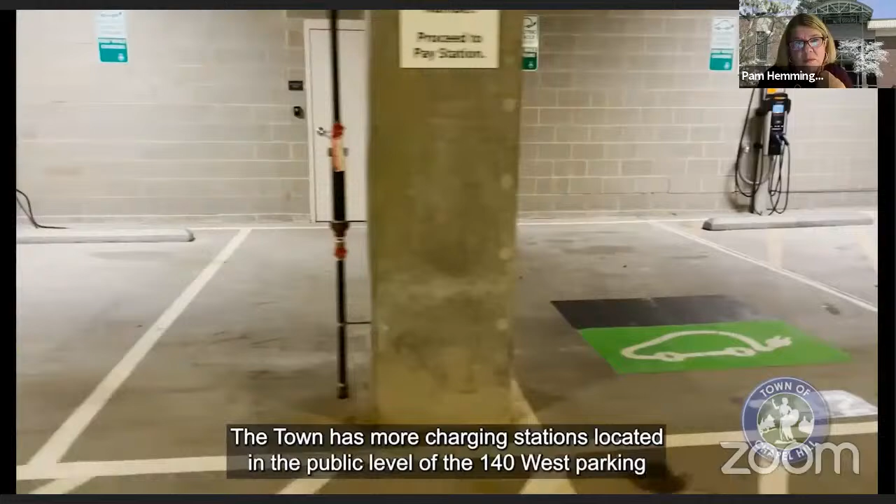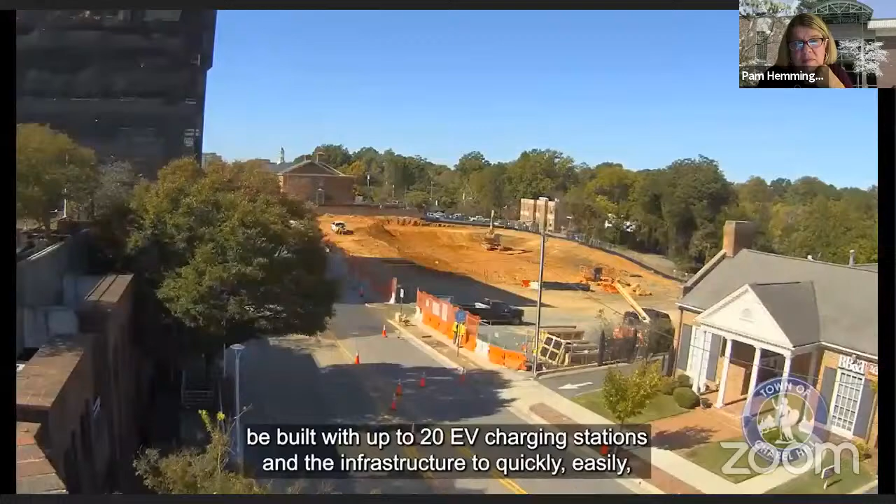The town has more charging stations located in the public level of 140 West Parking Garage and at the Homestead Aquatic Center, with many more planned for installation over the next year. For example, a big project currently underway is the Rosemary parking deck, which will be online in 2022. This deck will initially be built with up to 20 EV charging stations and the infrastructure to quickly and easily add up to 20 more in the near future.

The town has also received a grant from the Orange County Community Climate Action Grant Program to install charging station technology at Eubanks Park and Ride Lot. We've also applied to host several additional public charging stations at other town facilities through Duke Energy's electric vehicle pilot program. You can check out plugshare.com or the PlugShare app to see the available charging stations located throughout Chapel Hill.

This is wonderful progress, and a big thank you to our own John Richardson and Brian Litchfield and all the members of our town staff who've been working hard to bring these projects forward. Having a robust EV charging station network is critical as we green our fleet and support residents and visitors who are going green as well coming into our community. So thank you for that.

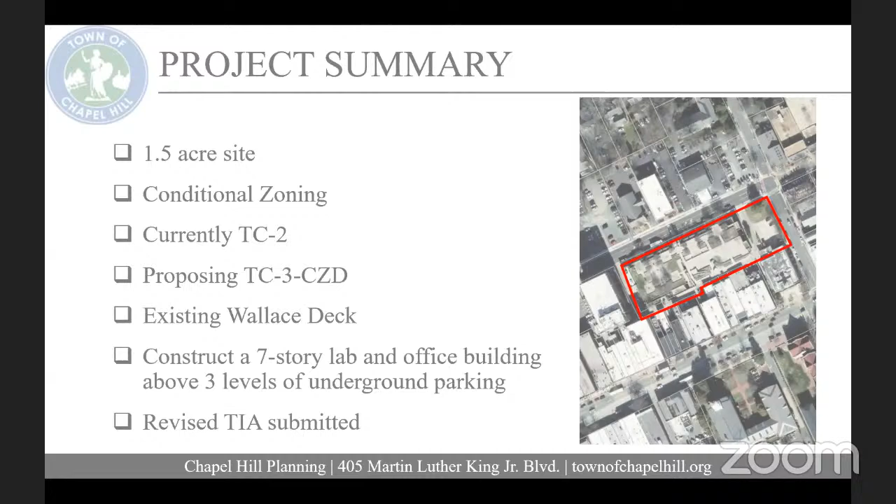This is an overview of the site plan. I'm not going to go into too much detail because the applicant team does a great job of explaining all the intricate details of the proposal, but just to give you an overview.

So the main building will be in this gray block. It's 7 stories above 3 levels of parking. The town green is proposed to be located on the right side of your screen.

There will be access off of East Rosemary Street and into the deck, and there will also be maintaining the NCNB alleyway behind the deck here with access out onto Henderson Street on the right side of your screen here.

There will be about 170 parking spaces in those 3 levels of parking, with 150 bike parking spaces inside the deck and then another 30 or so bike parking spaces outside.

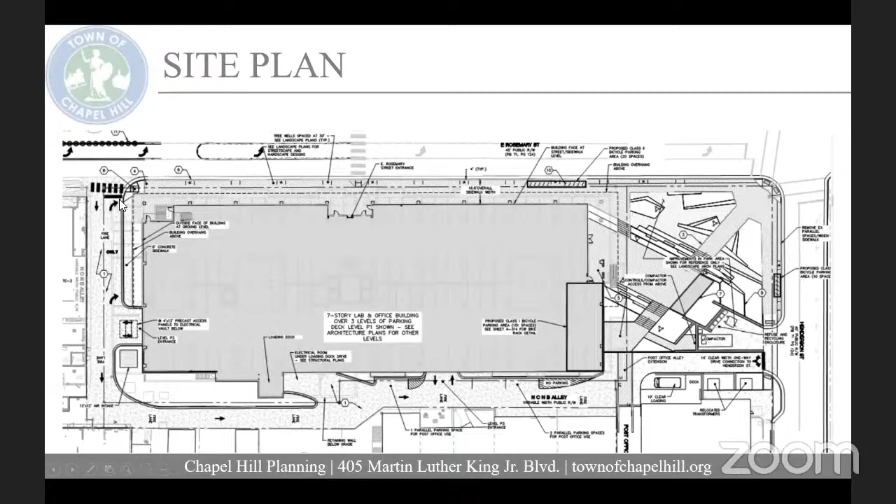And then there's also the solid waste, which will be located over here off of Henderson Street, and the streetscape will also be updated, the sidewalk along here, to match the rest of East Rosemary.

There is a proposed modification to regulations. The maximum primary height is 44 feet in the Town Center 3 zoning district, and the request is to increase that to 112 feet. Maximum secondary height or core height is 120 feet, and they're requesting to increase that to 140.

So this block shows what the by-right building envelope would be, with 44 feet here going up to 120 feet here. This shows what the proposed building envelope would be with the increased both primary and secondary height. So this is the section of the building that would be exceeding the by-right building envelope.

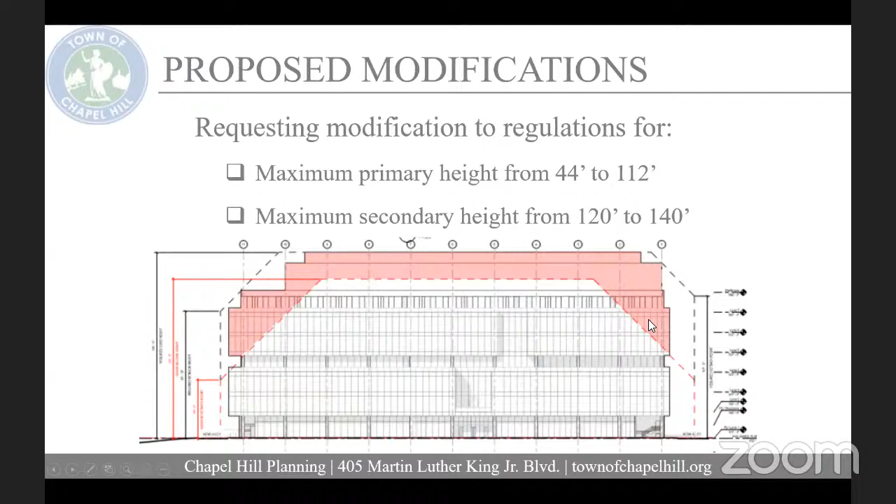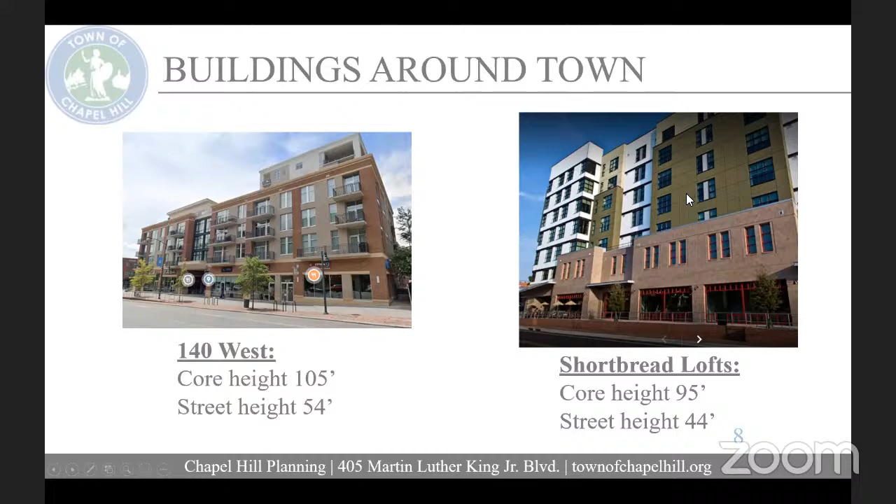And I just wanted to show a couple other buildings around town and heights to compare. So here we have 140 West, which is about 105 feet at the core height. Shortbread Lofts is up to 95 feet. The CVS building, which is right next to this, is 95 feet. Eastowne Medical Office Building is 90 feet, and Greenbridge is 135 feet at the core height.

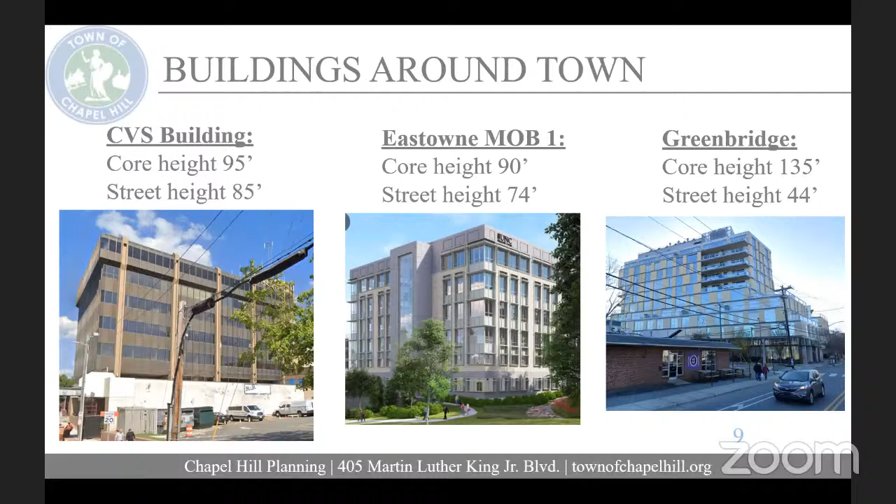Finally, I just wanted to go through the advisory boards and their recommendations. All of the advisory boards that this project has been reviewed by have recommended approval of the project with conditions. The Planning Commission had several recommendations regarding facade treatments and public art, and the LEED certification level.

They had some recommendations regarding activation on the street level at the first floor, and some considerations for electric bikes and electric vehicles and other bike infrastructure and parking needs, and also recommended additional shade trees.

The Community Design Commission asked to rethink the solid waste location and would like the mechanical equipment to be subject to review and approval by the CDC.

The Environmental Stewardship Advisory Board recommended to use biofuel instead of natural gas, wanted to incorporate plans for fresh air and ventilation, and use rainwater capture for non-potable water needs.

The Transportation and Connectivity Advisory Board had some recommendations regarding bike parking and electric vehicle parking as well, and asked for better delineation of the crosswalk behind the post office for the post office alley.

And finally, the Historic District Commission, they've also provided a letter to the council, which is in your packet with the rest of the advisory board recommendations. Among some other comments, they also asked for public art on the solid waste enclosure gates and to use town standards for the streetlights.

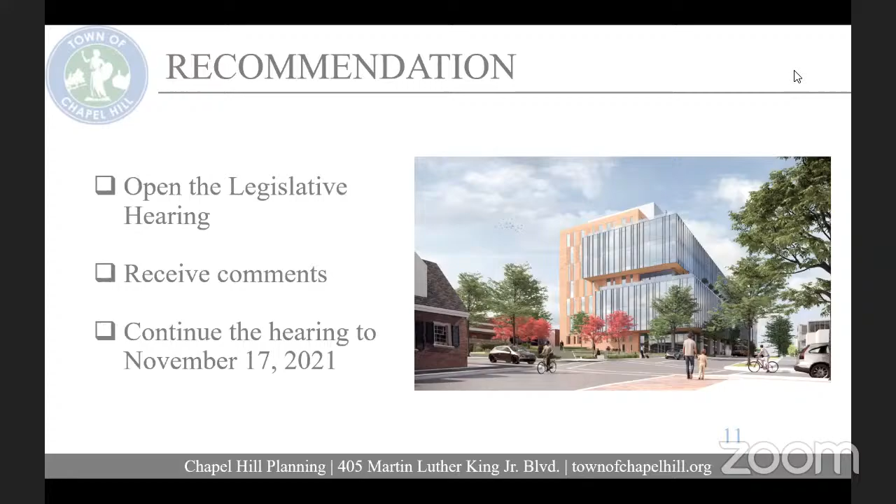So again, our recommendation tonight is to open the legislative hearing and receive comments, and then continue the hearing to the November 17th meeting. And the applicant is also here with a presentation, and I'm happy to answer any questions at this point, or we can wait until they're done.

Let's wait until after they've made their presentation, please. Thank you.

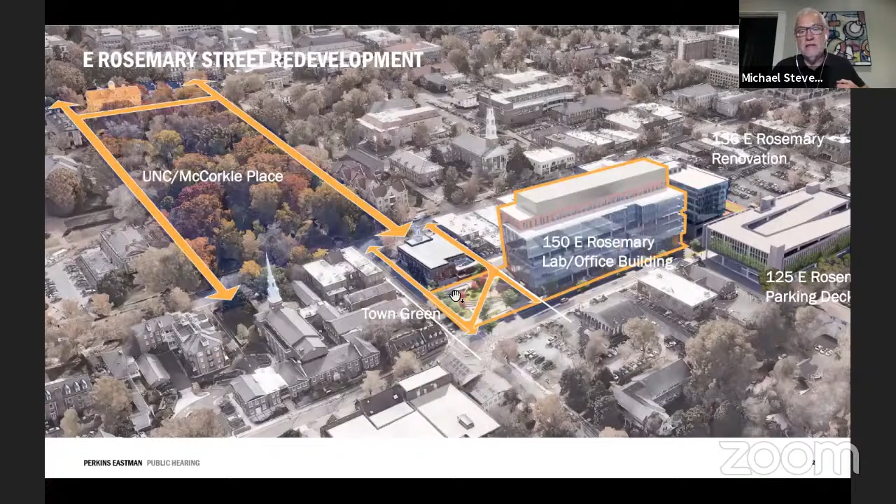We're very interested in the connections this is creating, the proximity to the UNC campus, and the connections between Franklin Street and Rosemary Street. We think some of the things we're doing in the creation of this new space will greatly enhance that, as well as the overall streetscape improvements being made.

So just a quick summary of some basic facts and figures. The building will provide about 238,000 square feet of office and research space, the new park, 158 car parks, 150 indoor bike parking spaces, improved pedestrian connections, widened sidewalks on Rosemary and Henderson, with new streetscape and trees that match the new streetscape on the other parts of East Rosemary.

We're really cleaning up the frontage on the south side of Rosemary Street. We're going from 4 curb cuts to 1. So we think that's going to really improve the pedestrian environment in front of the building.

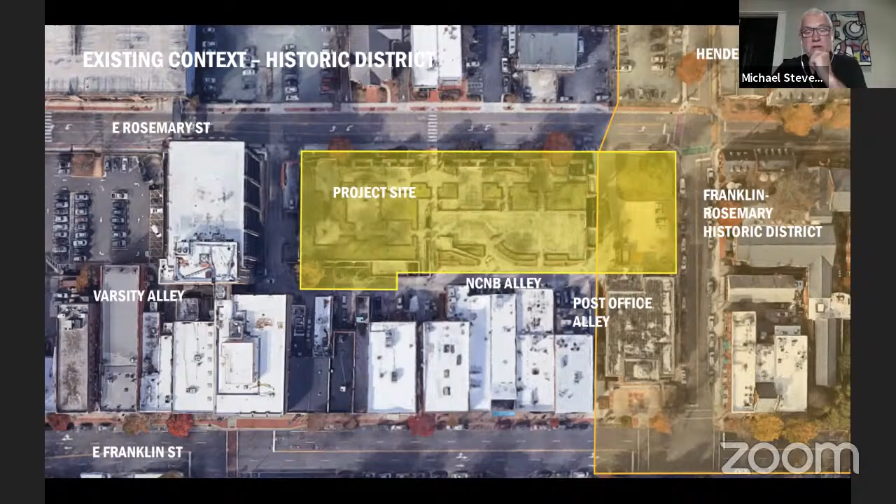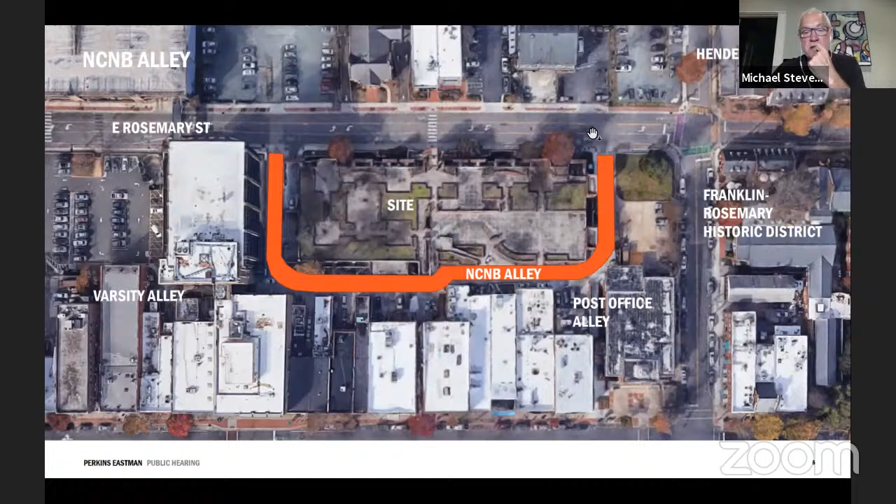The site is where the current Wallace deck is. The eastern part is in the historic district. We had been before the HDC multiple times and received their comments regarding that. So the alley, the NCNB alley, comes off of Rosemary, goes parallel to the back of the building, and then returns to Rosemary presently. Our design alters the eastern end of that to take the alley straight to Henderson.

What that does is allow us to create a continuous pedestrian space in the new park directly up to the face of the building without having an intervening driveway and traffic. So again, for the pedestrian experience, we think that's a significant improvement.

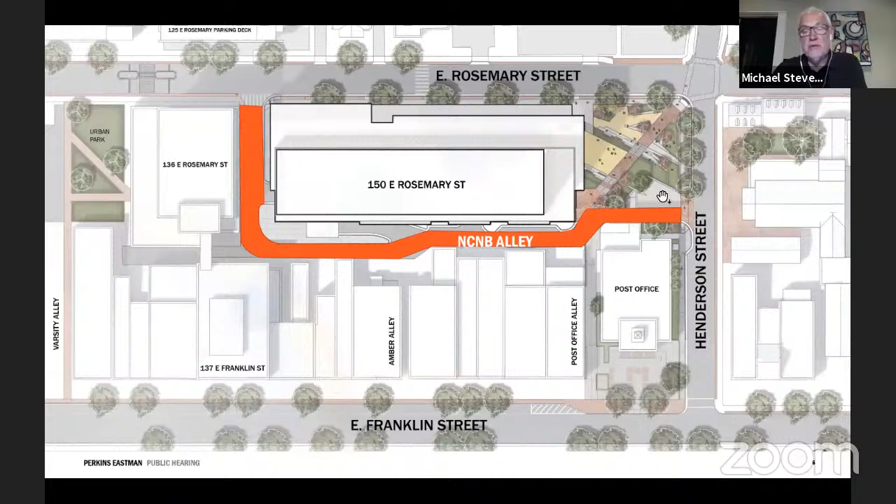But along with that, we also had to remove all the solid waste and other elements that are right at the rear corner of the post office, and they're going to be placed in an enclosed area along Henderson Street that'll be screened with field stone walls.

Just a snapshot of the ground floor plan. The entire frontage facing Rosemary will be storefront, so it'll be transparent. You'll be able to walk along and see the activities inside. The main entrance is in the middle of the building facing Rosemary Street.

All the parking is facing the alley to the rear, so it won't be visible from Rosemary Street. It's accessed from the alley entirely. The indoor bike parking is on that level, so bicyclists can come in directly from Rosemary Street along the side of the building and come into a door right into that space. We think it's going to be quite convenient for bicyclists to access.

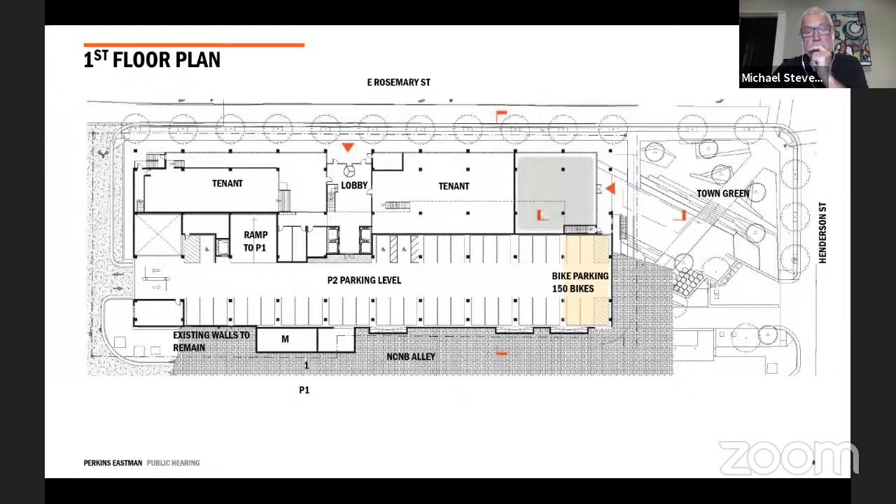So just a summary of some of the public realm improvements. The new park itself uses primarily materials that are compatible with the historic district, found in the guidelines. We're widening the sidewalk on Rosemary Street, which is quite narrow now. It'll be over 16 feet wide.

We're also widening it on Henderson Street by removing a few parallel parking spaces there and pushing the curb out, so we're going to get a generous sidewalk there. I already mentioned straightening the alley and cleaning up that whole service area behind the post office. So the entire walk from Franklin back to Rosemary is going to be a nice, pleasant pedestrian experience.

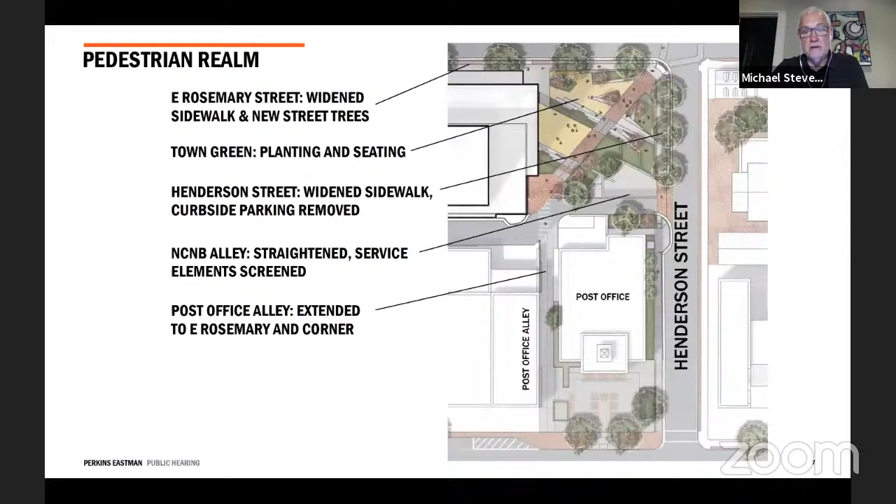Presently, the street corner is surrounded with this concrete retaining wall. It goes from a low point of around 3 feet to a high point of around 8 feet, which makes that space pretty much inaccessible for pedestrians.

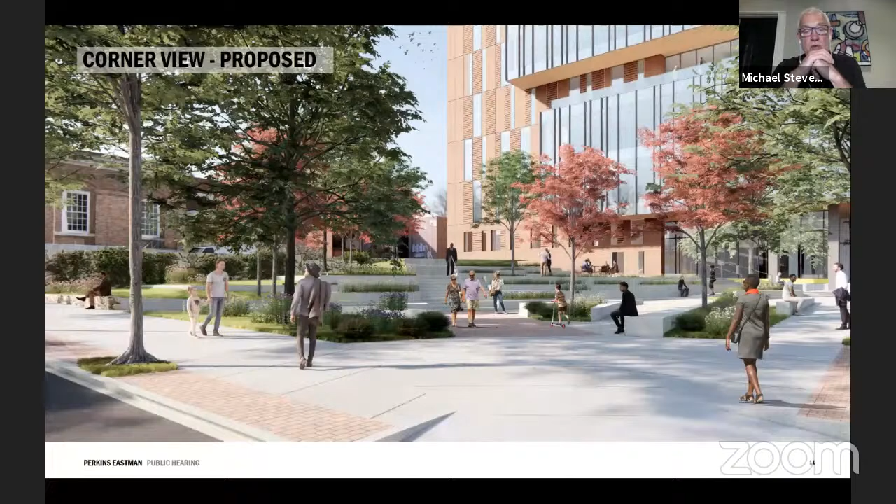So this is the present situation looking at the site from the opposite corner. There's a retaining wall, and the new design will regrade that, bring the corner all down to sidewalk level, make some very generous level areas with plenty of seating for people, and then a clear path up to the top of the space that leads one right into Post Office Alley. That grade change is about 15 feet from the high point down to the Henderson Street corner. We'll have new street trees as well as new canopy and ornamental trees in the park space itself.

Looking from the other direction, looking back towards Henderson Street, you can similarly see how much that's going to be opened up visually, opening up the frontages of those buildings, those businesses and other buildings facing Henderson Street, but also just physically opening it, making it much more walkable and pleasant for pedestrians to walk through or just linger.

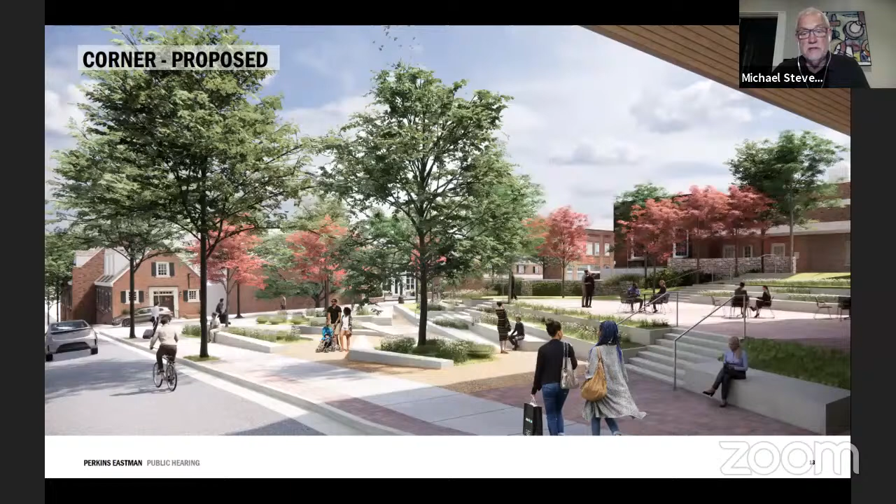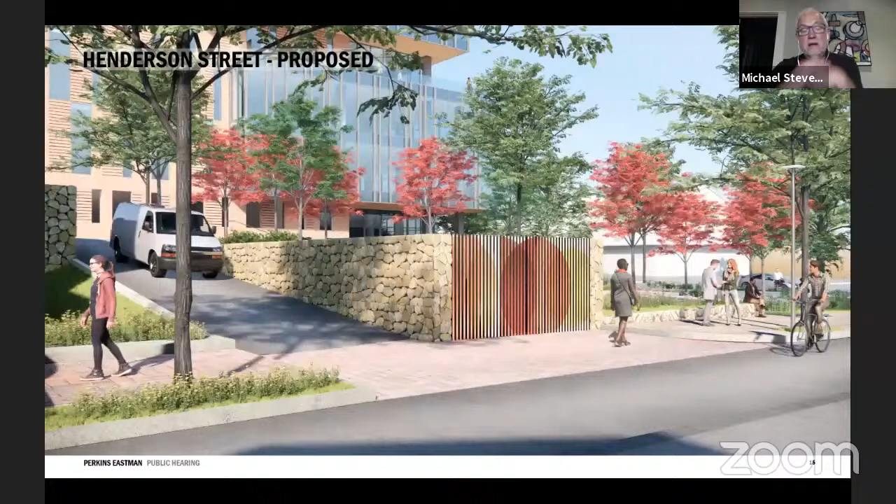Finally, the view of Henderson Street closer up to the post office, the present situation, and then this is what we're proposing. On the left, you can see the alley coming down to Henderson Street, and then those stone walls and that gate with the ornamental mural, those are screening the solid waste elements and the other things within. This gate is just a suggestion of a type of artwork. It could be many things, but we think it's an opportunity that would be great for public art, to have somebody commissioned to do something there.

We couldn't stay entirely within that envelope. It would result in a pyramid building, which really would not work for laboratories, but we tried to maintain the sense of scale and stepping and articulation that we believe is the intent. So we have these two glass-clad volumes that step back from the street, and they surround a central core element clad in masonry, so that the northern facade will have more glass, ideal for daylight penetration and natural lighting, and the southern facade will have smaller windows to limit the amount of solar gain.

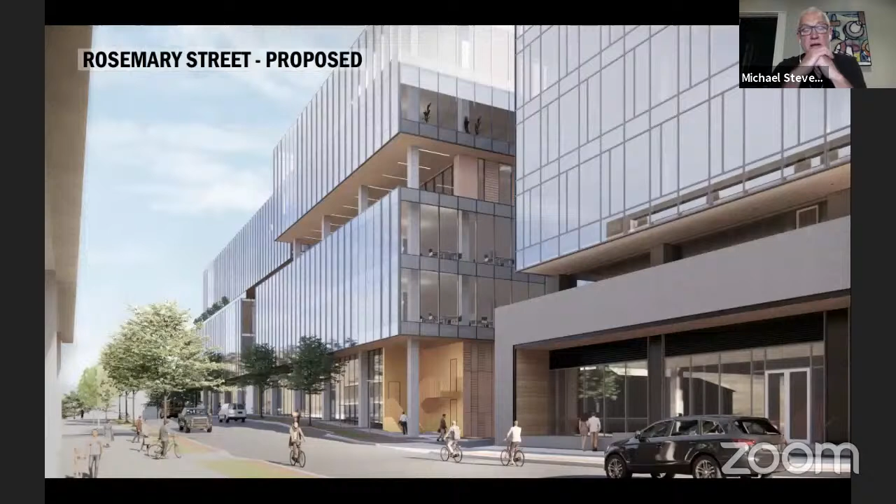The view back, looking east on Rosemary Street, on the right is the existing building that's being renovated. Of course, that old bridge is now gone, but this is the proposed design. Again, you can see the way the building mass and facades have been articulated and broken up into smaller pieces to try to maintain that sense of scale on the street. The continuous storefront facing Rosemary Street, and then an open stairwell that starts to relate to the one in the parking deck, which would be behind where you're standing in this view, to give access directly down to parking.

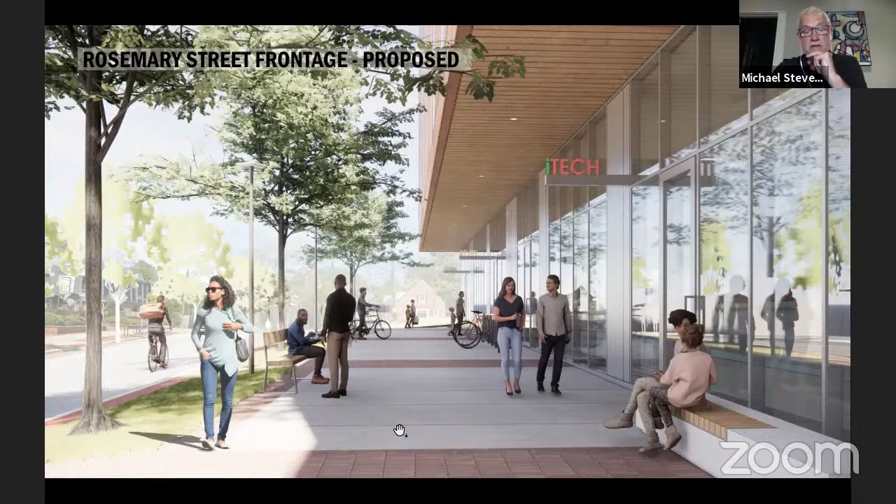And then the frontage on Rosemary Street, the condition now with the narrow sidewalk and the pit that provides ventilation to the parking deck, that will be covered over with a new sidewalk. That's about 16.5 feet wide now to the glass line from the curb. It'll be partially covered for rain, and it provides, as I mentioned, this continuous transparent storefront and a very clear path of travel along the street down to the corner where the new park is.

So that's our presentation for tonight, and we welcome your comments and questions.

All right, Mr. Stevens. Thank you for the presentation. Got a few questions here.

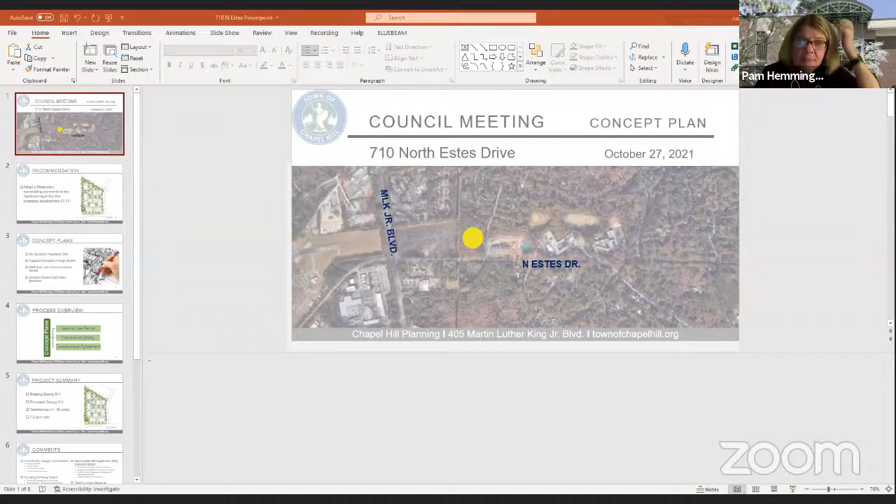Good evening, I'm Judy Johnson with our Planning Department. I have a brief overview presentation on this concept plan at 710 North Estes, and then we'll turn it over to the applicant. So you can see the property in question is on the north side of Estes Drive.

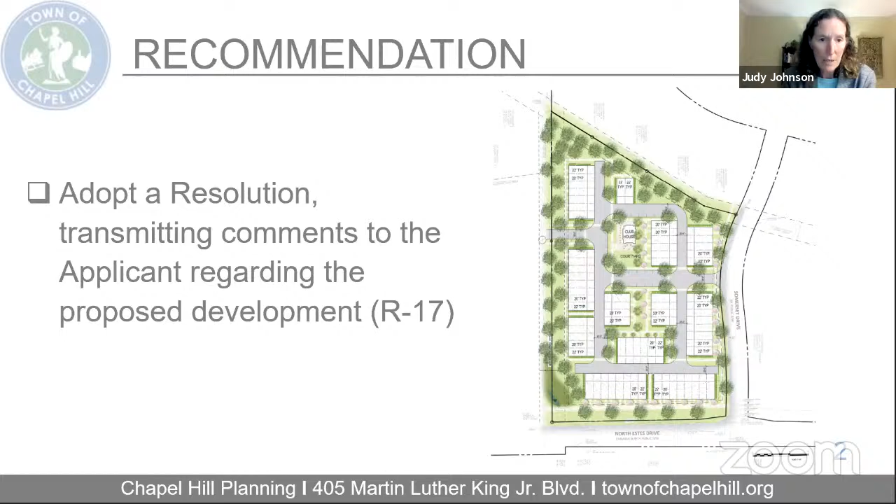Coming up through the middle there is Somerset Drive. It's adjacent to the Aura property, just to the east, which I know you're all familiar with. Tonight we're looking for transmitting comments to the applicant regarding this concept plan. Just to remind you, concept plans involve no decision, it's feedback only from council, looking for just some preliminary input to the applicant.

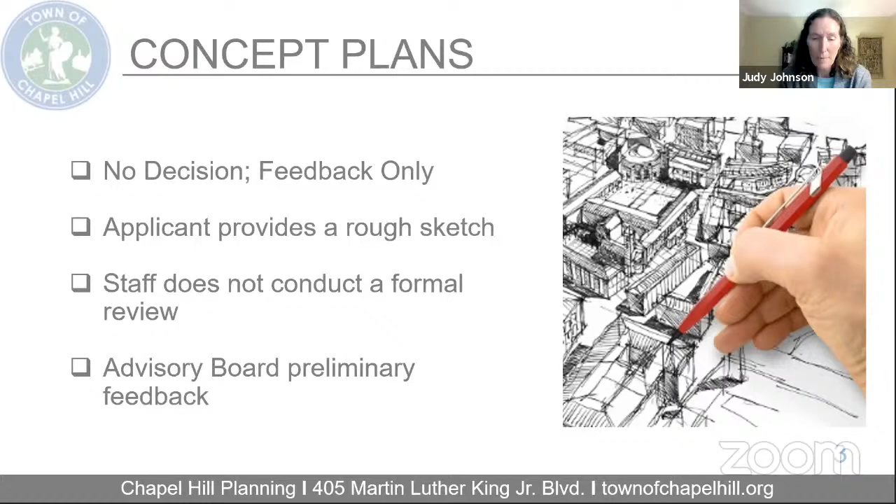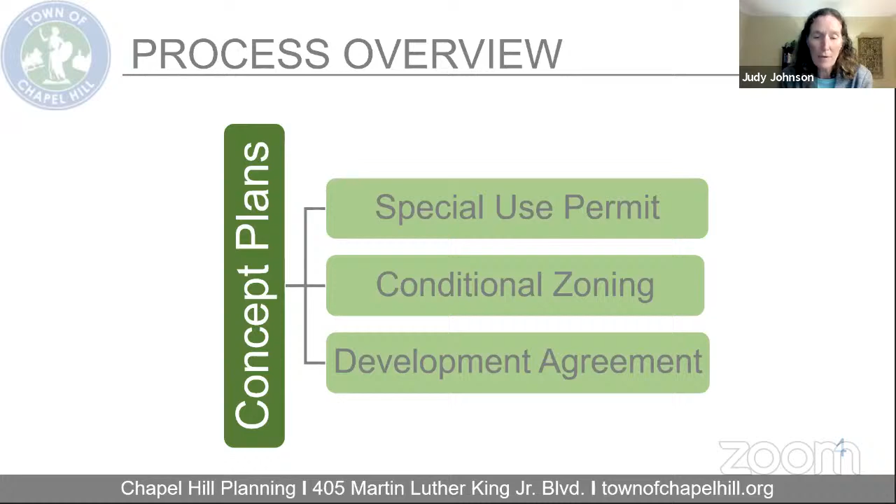Following the concept plan, there's a possibility of 3 choices to go forward. We do anticipate that this project would come forward as a conditional zoning. We do encourage the applicant to discuss alternatives, specifically if they wanted to pursue a development agreement with council.

Very briefly, the lot is a little over 7 acres. It's currently zoned residential 1. You can see Estes on the bottom of the property there, and Somerset just to the right of it. They are proposing rezoning the property to residential 5, approximately 78 townhome units.

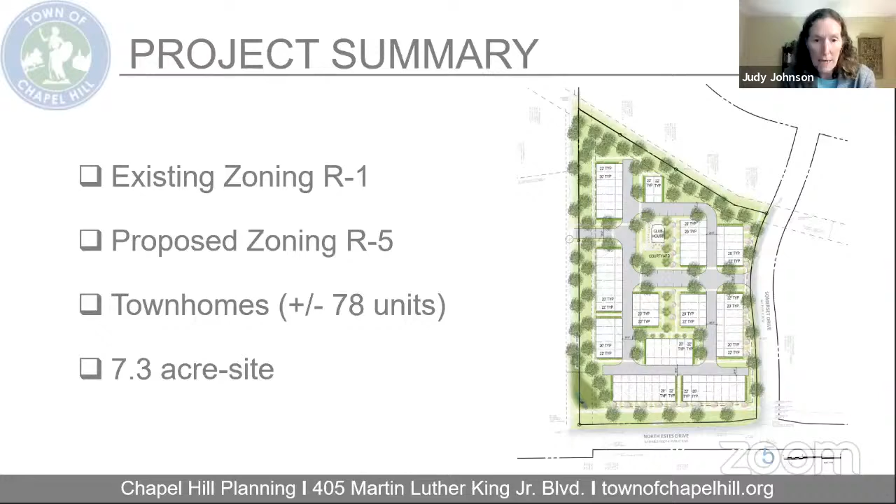This project has been reviewed by our now 3 advisory boards that look at concept plans. It went to the Community Design Commission and the Stormwater Management and Utility Advisory Board last night, so you got those comments late this afternoon. To summarize briefly: concerns about the northern buffer, the amount of green space, architectural details, and environmental aspects from the Community Design Commission. You all did just receive those full comments from the 3 boards.

The Housing Advisory Board looked at this 2 weeks ago or so, and is interested in a variety of housing types, looking for the applicant to engage with the Community Home Trust. It did also go to the Stormwater Management Utility Advisory Board last night. I know they struggled a bit, as they needed and wanted additional information to be able to provide more robust comments. In your packet is also Brian Peterson, our town urban designer's comment.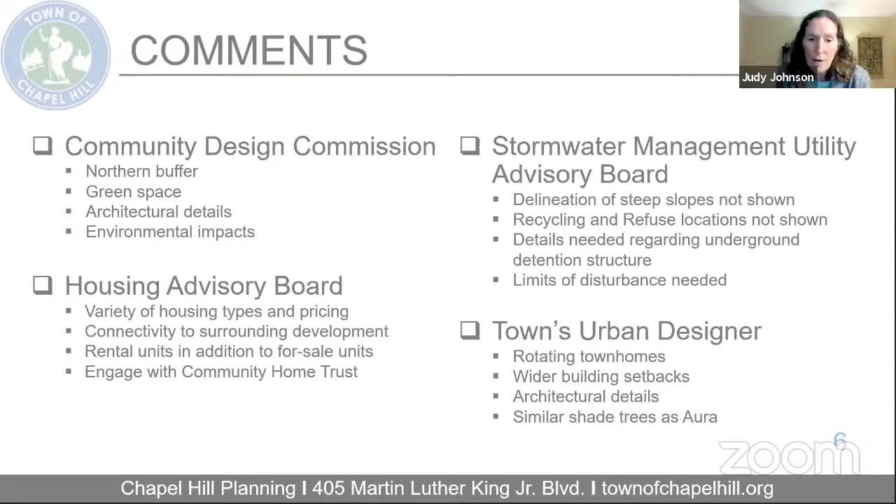He has met with the applicant and has made some suggestions. I'll let the applicant discuss what they have taken from those comments.

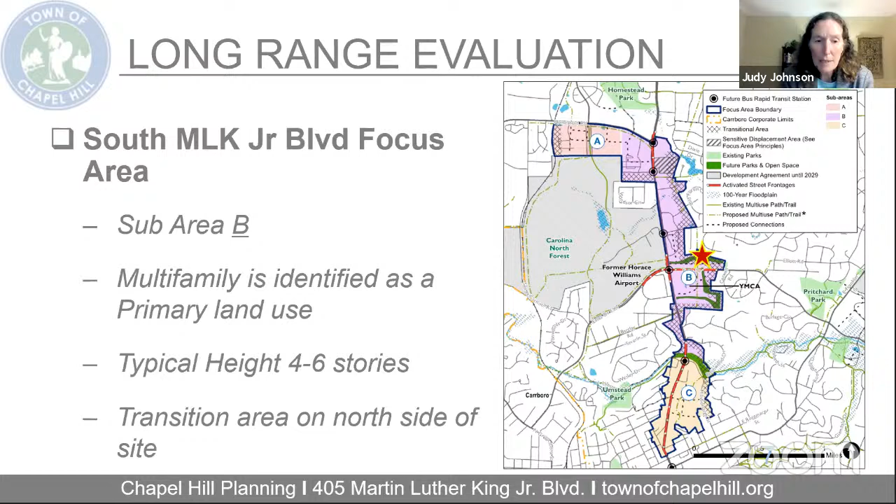As we've been trying to briefly give you context of the property regarding our long-range planning efforts: it is in the future land use map, which was adopted about a year ago. It is in the South MLK Junior Boulevard focus area, sub-area B. You can see the star there, just north of the B. Multifamily is identified as one of the primary land uses in this area, with heights up to 4 to 6 stories, but with a concern about transition on the north side of this property with respect to the single family neighborhood joining it.

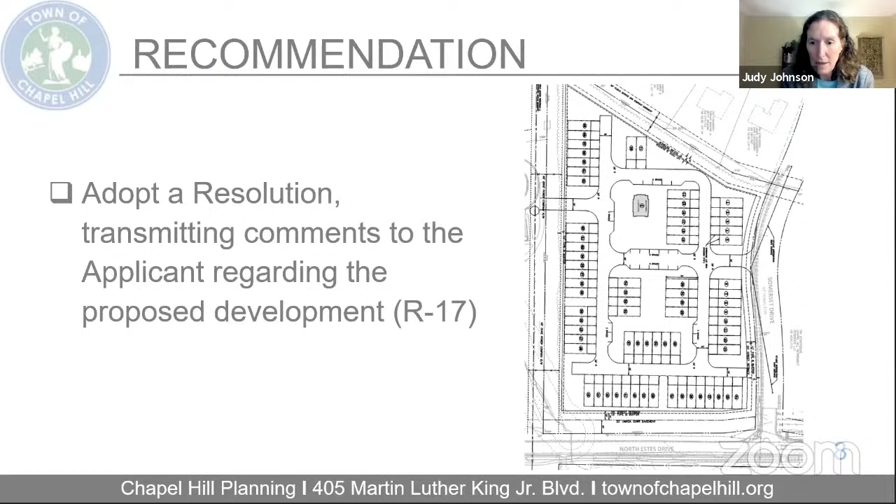And that concludes my presentation. Happy to answer any questions. If not, I know the applicant, Shea Cashen, is here, and we'll go right to the applicant and save our questions, please. Okay.

Thank you, Judy. Let me just set up my share screen here, and I'll jump right into a quick presentation.

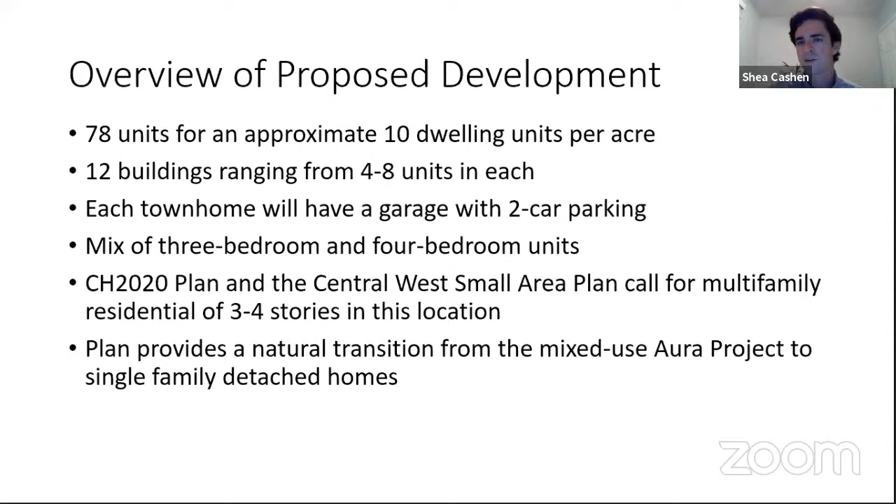We did meet with the Housing Advisory Board last week. Some feedback from constituents and board members included potentially supporting more density on this site by doing maybe a 2/2 style condo townhome or a multifamily building at the front portion or along the Estes side of the project, continuing with that theme of a transition from the higher density along Estes and then moving down in density or height as we move toward the rear of the site bordering the Somerset Huntington Drive neighborhoods.

We also met with Kimberly Sanchez and Lori Woolworth with Community Home Trust after we met with the Housing Advisory Board, and we received some great feedback on the affordable housing needs of the overall community. With that in mind, our intent is to continue to work with CHT and follow the local inclusionary zoning ordinance, but we don't have the specific unit mix or locations yet - some of that is still pending based on addressing other new comments from the boards this week.

As far as stormwater management goes, we were able to clear up a few of the questions that were outstanding from last night. Our underground stormwater facility is proposed to be in the southwest corner of the site. There are some steep slopes on the site, but we anticipate that will be under the 25% threshold, so we are not anticipating needing a modification for that - it's mostly on the perimeter of the site. The land disturbance is about 6 1/4 acres, and the impervious area proposed is 46%.

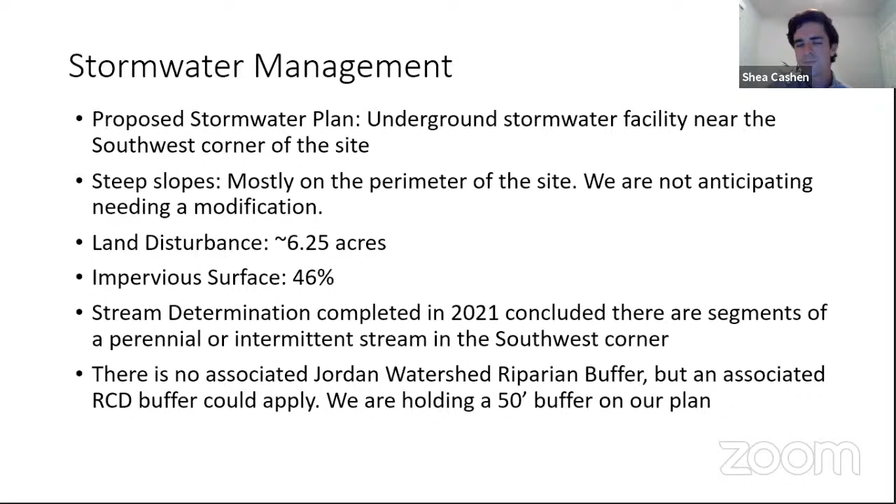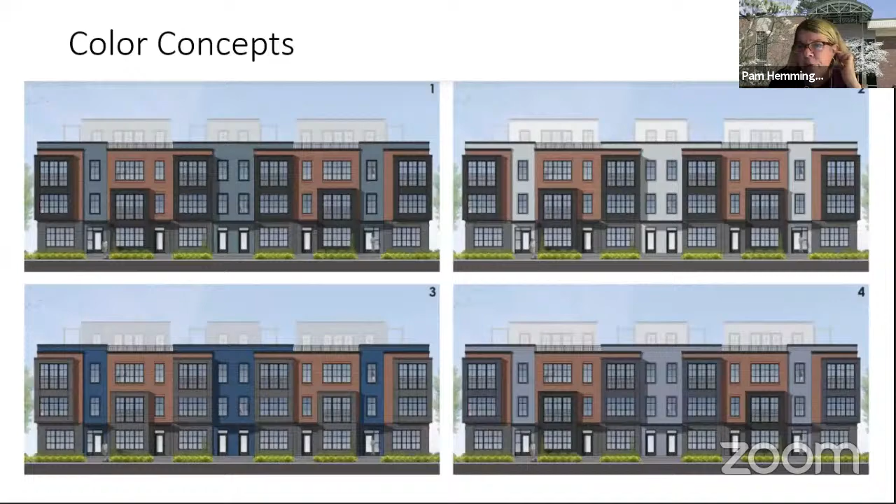Okay, council clarifying questions, and we'll hear from the public and then come back to council comments. Ms. Anderson. Yeah, thanks. One question is, what price point are you looking at for the units?

Shea, you're muted. Sorry about that. Thank you for that.

That's one item we're still trying to figure out as we confirm a unit mix and final approved number. We are looking to provide missing middle housing for family units, which is the focus of the 3 and 4 bedrooms. With that being said, some early pricing models had units starting in the 500s and going from there, a wide variety, but we certainly need to confirm the overall mix once we get a little further with the council and the community.

Thanks. Okay, others? It's Ryan and Mr. Parker.

On the western part of your property, there's a Duke easement that we're hoping eventually becomes a greenway. Is that all on the Aura property? Do you share that with Aura? Do you know what the land ownership is there? I believe it straddles the property line. I think it's a 30-foot easement. Okay, thank you.

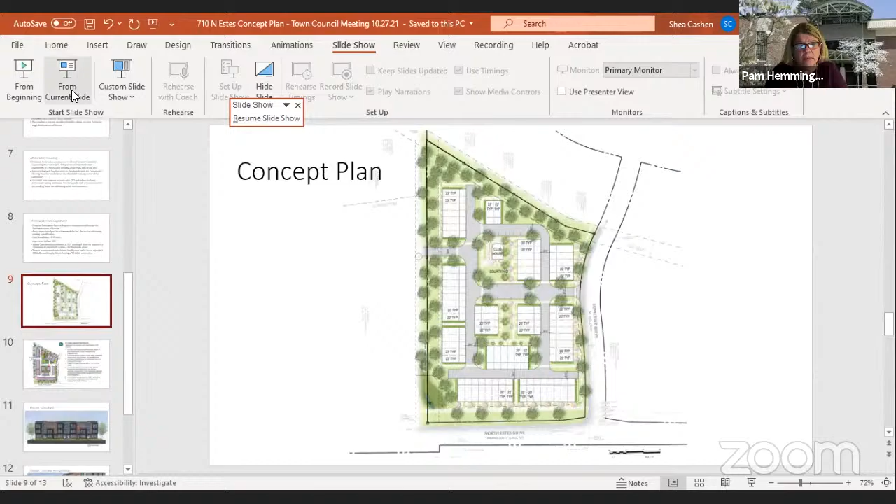Sure, so the primary entrance would be off of Somerset Drive. One of the comments we received from Brian Peterson in Urban Design was to try to have that align with the entrance across Somerset for Azalea Gardens Retirement Community. So that would be the primary access there. And then the second access point would be across the Aura project, close to the townhome portion of that project at the rear of their site. So just the two means of entrance and exit there.

So for that second entrance, does it need to go through the RCD or the creek in the middle? Yeah, the one next to Aura. I'm not sure, Jesse, would you be able to speak to that? Yeah, so the RCD is actually at the southwestern corner of the site, so that connection would not be punching through the RCD.

Oh, okay. So if you needed this second access, do you need to have conversation with Aura for your traffic to go through their property? So I think that those conversations still need to be had, but when Aura was designed, it was set up so that there would likely be a connection to this property there. So you have not engaged any conversation with them, but if you need their property to have your traffic go through their property, I'm sure you need some agreement with them. Is that right?

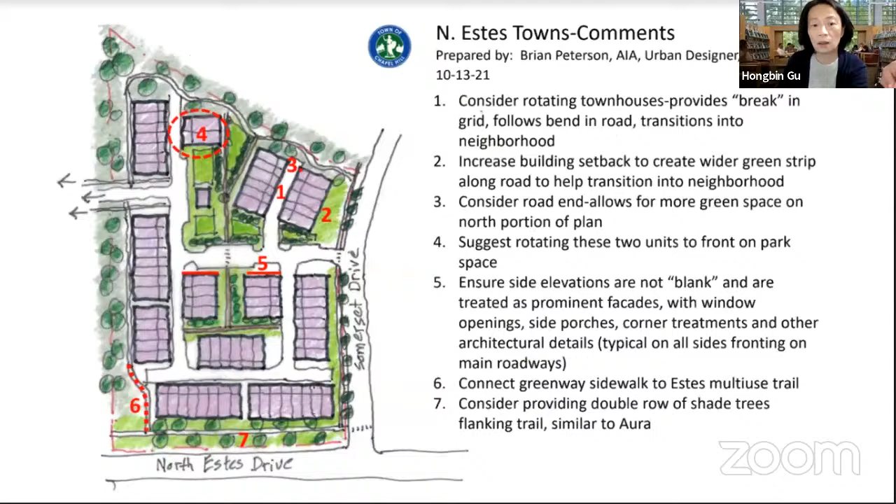That's right. So it is not shown on this concept plan, but we have every intent of working with the town to complete what we understand is that missing link in the multimodal path. You're correct, it's not shown in this preliminary drawing, but we do intend on including that as part of our development project.

Okay, so let's assume there is this multimodal path going through the front of your property, but these townhomes are facing inside, right? The one facing Estes Drive is the back of the townhomes.

Yeah, that's a great point. David, would you mind going through the rear load and front load as we discussed last night? Sure. So all of the rows along the perimeter are facing the perimeter of the property. The rows along North Estes would front North Estes. Equally, the rows along Somerset would face Somerset. And then the 3 rows of towns along the shared property line with the Aura project would face the Aura project and the green spaces in front of those. Internally, each row would be facing and fronting the green space.

So that would entail that all of the rear of the townhouses would be rear loaded along the street edges shown. Oh, so your internal streets will have, on both sides, the back of your townhomes? Correct.

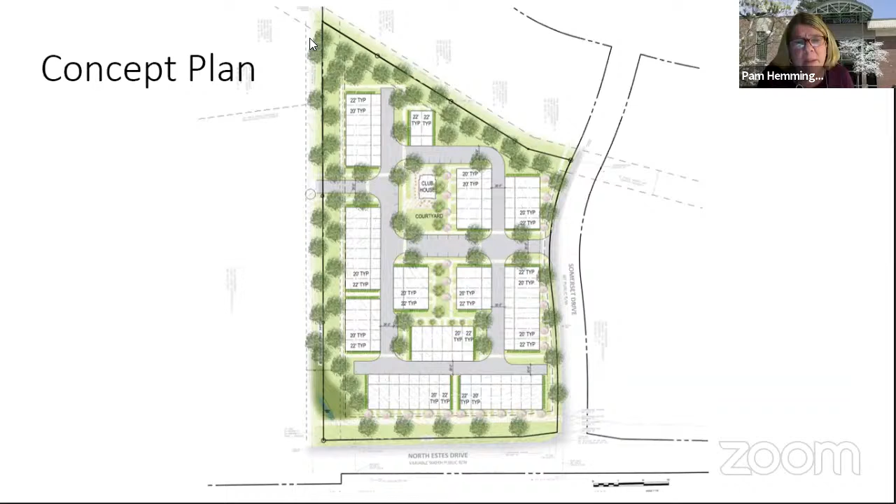So can I ask why, you mentioned there would be perhaps rooftop amenities. Is there a reason to do that versus ground yard space or deck space? I can speak to that. There's 4 flights up to get there, so that's interesting, and noise is one reason I'm asking as well. So there's just an opportunity to utilize some of the overlooks.

Specifically the rows that happen along the edge of Aura will have some nice views overlooking the green space there. And again, Madam Mayor, it is a concept, so we'll be weighing the reality behind those rooftops, but it's something we're interested in pursuing at this point.

Okay, and your design is modern, which is fine. It's just that we've seen when townhomes face the street side, it's more of a stoop effect that makes it look more integrated with the community as far as housing. It was interesting seeing your front—it looked more almost like a commercial office front. So I didn't know what the thinking was with that.

The stoops are still young in design. There is some topography that would happen, changing a bit from row to row, so there will be a more pronounced stoop expression that develops during the design of the rest of these towns. We do want to take that seriously, and it's a good point you bring up.

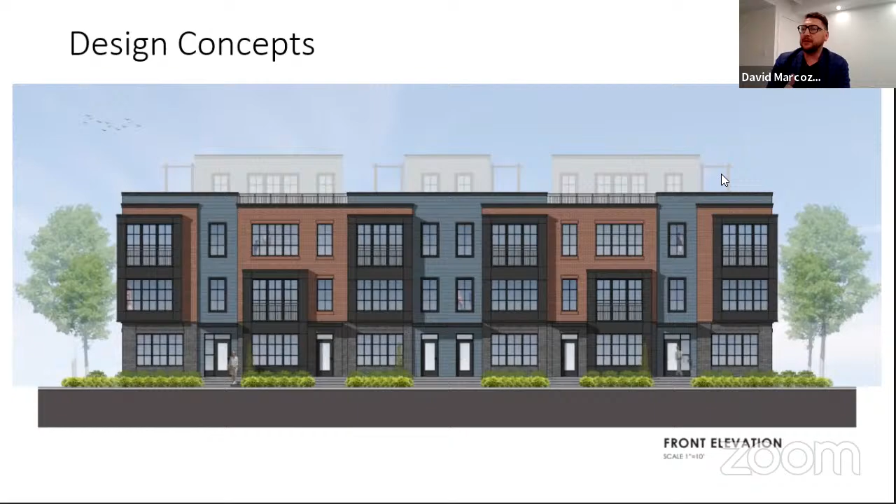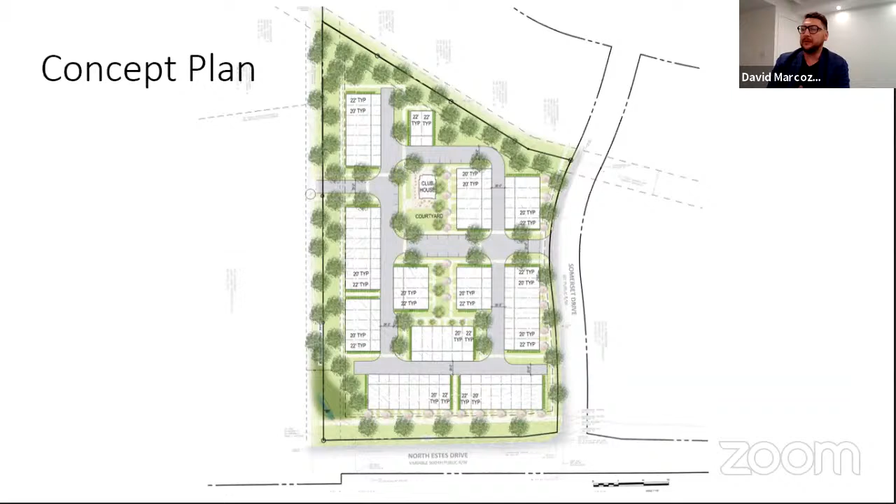How far back would you be from the multimodal path on this concept? That's also a good question. Shay, can you go back to the site plan? We haven't dove into specifically how the multi-use path along North Estes aligns with our adjacent properties, so it's still under investigation. But there would be some small green space in front of the stoops before we get to that multi-use path for sure. I could only guesstimate about 8 to 10 feet approximately.

Well, I know we have members of the public wishing to share comments. We welcome your comments and ask you to try to keep them within the 3-minute range. I didn't know the group was hoping to do a presentation, but I didn't hear from them, so we'll see how that shakes out.